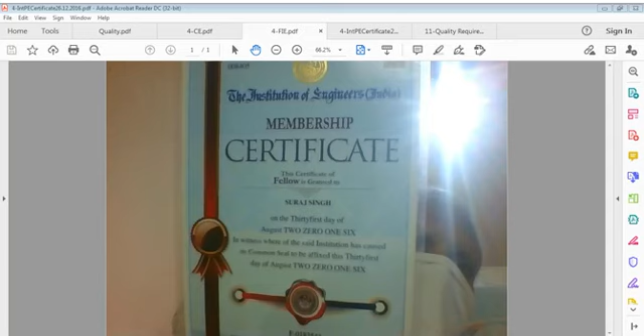Both of these classes I cannot call professionals because they are paraprofessionals. Meaning if somebody does it, they accept it, or say I have done it. If somebody does not, they ignore that. This point is not for criticism. This point is for the world, and in particular for our country, India, Bharat.

I'm interested in relating COVID-19 to quality and to the role of engineers, because the role of engineer applies everywhere in life. My purpose was to show you not to believe in certificates alone, because certificates tell something but people do not always do that. That point we must understand.

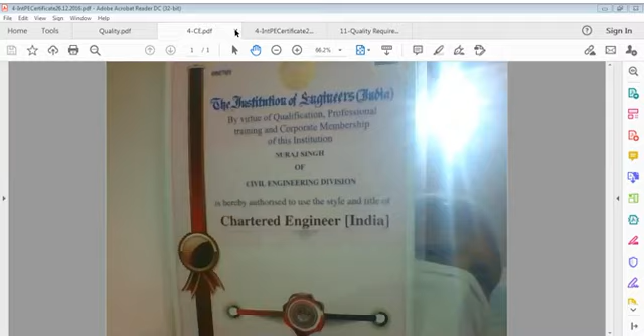It's not for everybody, but in general, people should believe in quality, not only believe it but work on it. My experience, whatever small or insignificant it may be, is a reality of the world.

If you work at many locations in the world - many thousands of you have worked at many locations in civil and construction engineering around the world, in the Middle East, in Gulf countries, in the West, or countries like Iraq, Iran, Libya - those who have worked in many countries, there will be many people like me. Just for your information, I have worked in Iraq, Libya, Qatar, Abu Dhabi or UAE, Saudi. These are certain countries I worked in.

What does it indicate? It indicates that you should have different, varying experience. I have been fortunate to work with more than 50 nationalities of all ranks and designations. This means one who is exposed to many nationalities is bound to have exposure to new types of work culture, new types of people's nature.

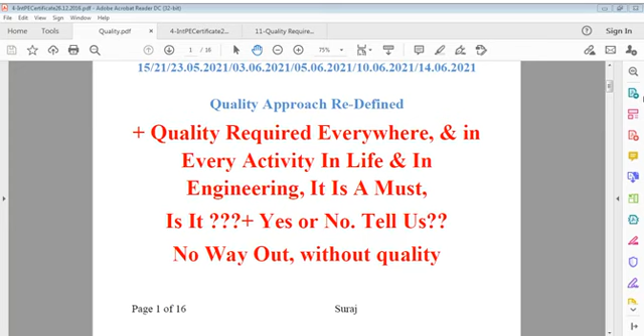Our project manager or director used to say, 'Oh, it's only a manhole, go and excavate, do it. It's nothing, it's not a project, it's not a building, it's only a manhole. You do not make concrete for 50 manholes per day, 20 manholes per day, like that.' He used to say it as if everything was so easy. They did not keep quality system in mind, because our project manager was from Bharat, India, of course South, and also the same, another person from Bharat, India on another project.

And I was on the Sharkat Grain Silos project, whose ancillary buildings I was taking care of. I still remember one resident engineer named Kifa. My colleague, who has left now, Mr. Chauhan, was taking care of the road project there, RCC paving. He told me this Kifa is very, very dangerous, everybody fears him. Though it was EPI company, the main contractor, nobody could face that resident engineer, and don't argue with him because he's very, very strict.

I said, what strict, let me see. I still remember 2 or 3 instances. He talked to me due to some activity I was doing on site. First I submitted my design of one slab. There was a slab left on one building, a workshop building, I still remember. Design of the roof, one slab was left, it was not done by PI for some reason. I did it myself, and though it was very small, I still designed it that time, manual design, everything, drawing, and we got approval.

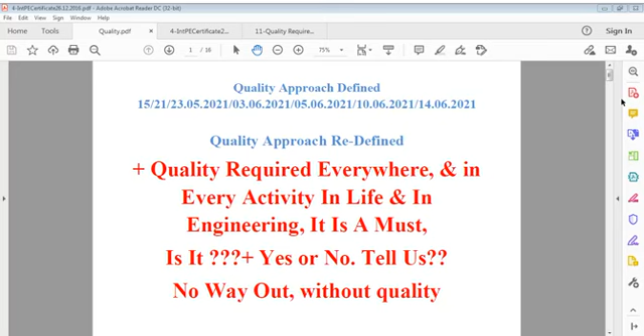So I am saying that quality is required everywhere, in every activity in life, and in engineering it is a must. Is it yes or no? You have to tell us. There's no way out without quality. Quality has to be complied with. Defined requirement, no future if no quality persists.

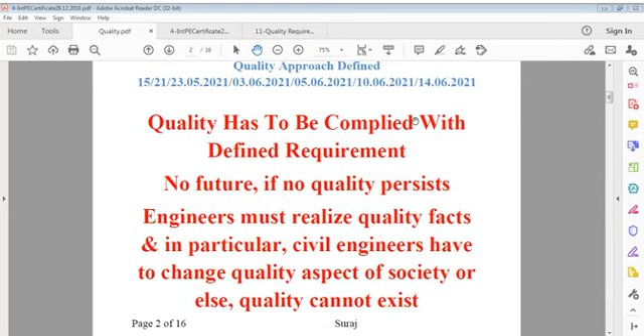Engineers must realize quality facts. And in particular, civil engineers have to change the quality aspect of society, or else quality cannot exist.

Systems quality to be devised. When I say devised, it means designed and achieved. Broken system means broken life linked to the system. Broken system means broken life that is linked to the system.

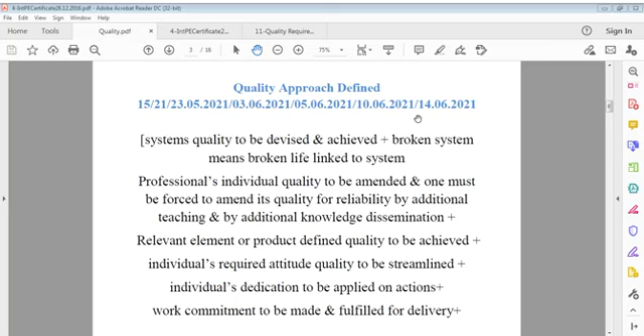Professionals' individual quality to be amended, and one must be forced to amend its quality for reliability by additional teaching and by additional knowledge dissemination. Relevant element or product defined quality to be achieved.

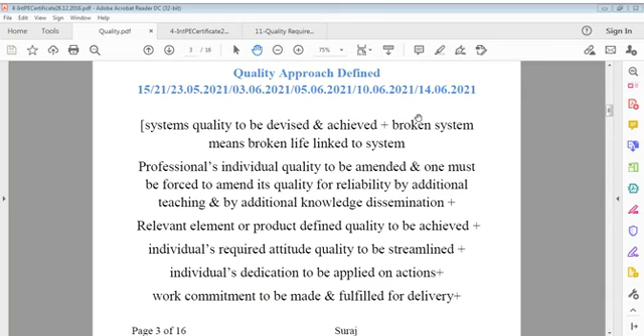Individuals' required attitude quality to be streamlined. Individuals' dedication to be applied on actions, work commitment to be made and fulfilled for delivery.

All other parameters to deal with pre-requirements and requirements, designs of structures and others must be decisive, qualitative and reliable for prosecution. All stages, designs being significant, but mere design does not suffice if construction and development are not affected to specified marks.

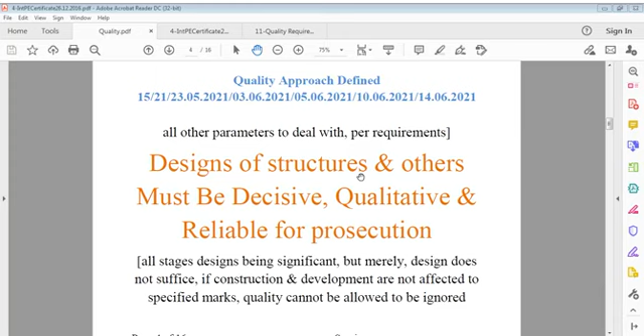Quality should not be allowed to be ignored. Design drawings must have quality input, and duly coordinated to produce working details, keeping abreast of site working conditions.

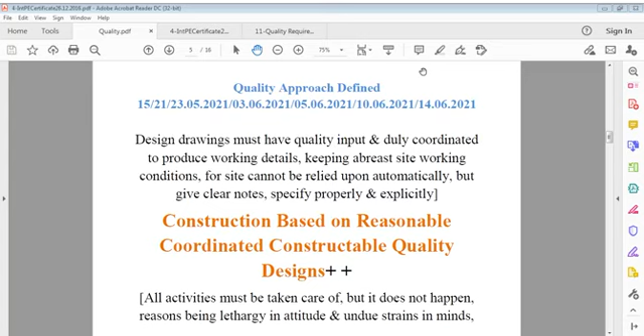Site cannot be relied upon automatically, but give clear notes, specify properly and explicitly. Construction based on reasonable, coordinated, constructible, quality designs. It's a very important point: construction based on reasonable, coordinated, constructible, quality designs.

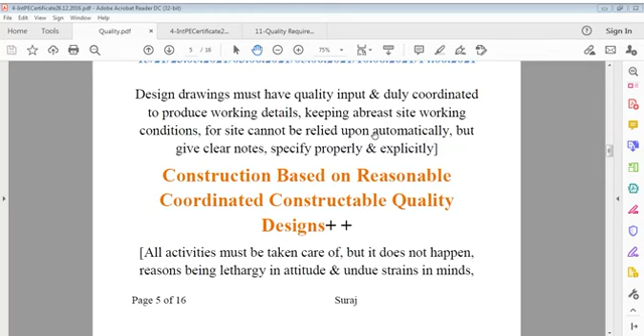All activities must be taken care of, but it doesn't happen. Reasons being lethargy in attitude and undue strains in minds. Why should site work suffer? Because of deficiencies in designs.

Design accountability must be fixed, it says, if accountability on the constructed product or element is required. Design and construction qualities are complementary to each other, and without integrated coordination, activities worked upon shall result in quality-less results.

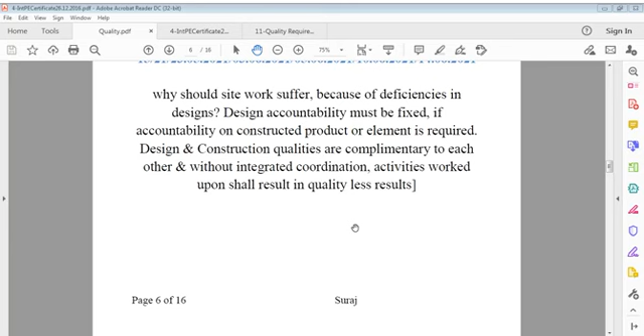These are just a few statements that I make in the interest of quality, and also construction method statement, a must for implementation. Because expression of specific details in convenient format, meaning usable format, readable format, not very complicated format, for work performance and defined elaborate performance, or else no work can be carried out in sequence and output suffers.

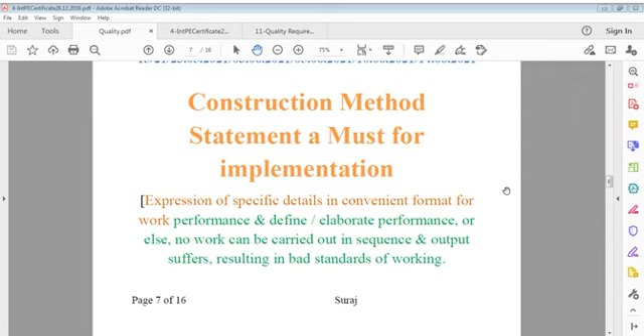Expression of specific details in convenient format for work performance and defined elaborate performance, or else no work can be carried out in sequence, whereby output suffers, resulting in bad standards of working.

Method statements must be made necessary for activities implementation, or else diverse ways can be used by site teams. Diverse ways, not one way, and diverse ways mean a problem, used by site teams without achieving any level of uniformity and consistency. Work harmony may not be found, work scaling cannot be found. One team does one way, another team does another way, so uniformity cannot be found.

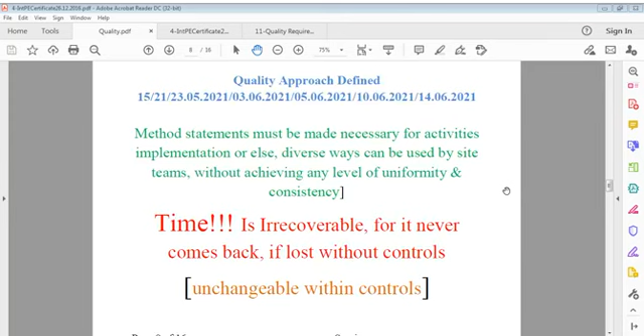Time is irrecoverable, for it never comes back if lost without controls, unchangeable within controls, and then we can say cost invariable escalation. Risks must be foreseen, for resolutions, for damages are not tenable.

Risks must be foreseen by a professional, an intelligent person, foreseen for resolution, not for enjoying. If you can foresee risks, it means you are an experienced person who keeps thinking in various aspects. Risks must be foreseen for resolutions, for damages are not tenable. Damages we cannot absorb every time, and these must be controlled in advance. Inexperienced engineers may prove inefficient in viewing such risk-based emergencies.

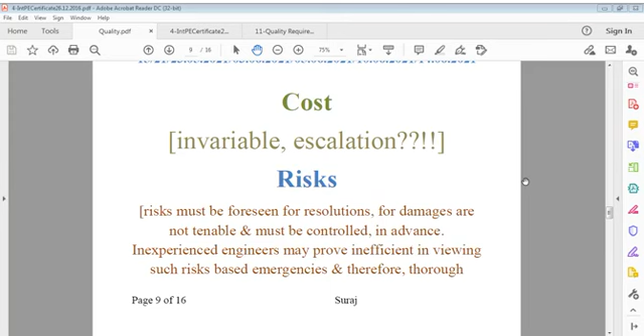Therefore thorough deliberation or brainstorming must be conducted based on available data input. Risks must be clearly defined to reach its resolution and to convert to work convenience, or else risk can be very expensive in terms of lives and cost.

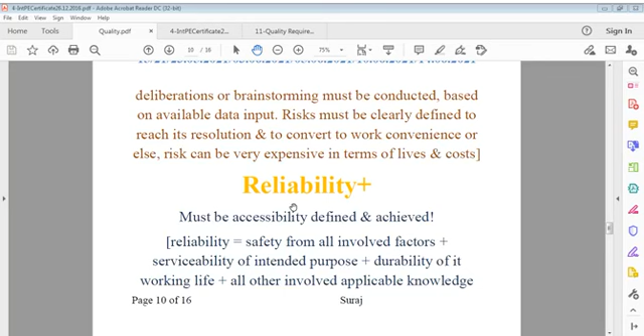Reliability must be accessibility defined and achieved. Reliability is equal to safety from all involved factors, plus serviceability of intended purpose, plus durability of its working life, plus all other involved applicable knowledge, areas, factors, resources must be understood and achieved in all procedures, or else one should learn before taking responsibility, and all foregoing issues must be considered along with all possible risks.

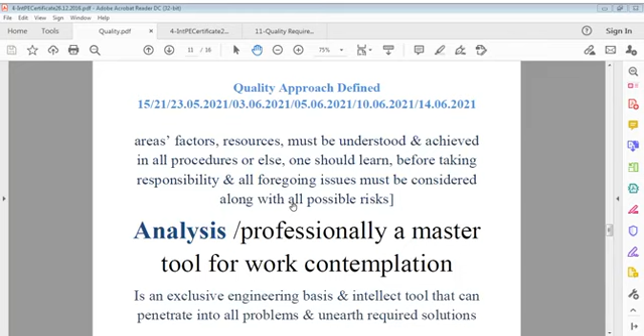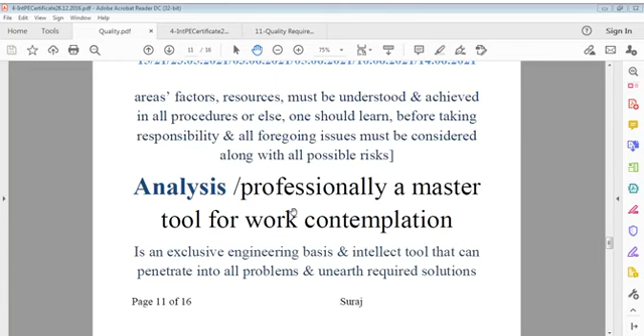Analysis, or professionally a master tool for work contemplation. It is a very important point to say it is an exclusive engineering basis and intellect tool that can penetrate into all problems.

And there exists no way from where or through which analysis approaches could be avoided. All problems must be understood by this approach.

This is very much, you can say, the concept of quality which we have to take care of. We cannot take quality for granted. Quality approach is variously immense, it's varied. Quality at different levels is defined depending on funding and depending on goal in life.

When you pay for something, what do you think? You should get that, right? That's what everybody thinks. When I pay for this, I must get that. That is the simplest form to understand quality. You pay me back what I pay for. If you don't pay me back what I pay to you, then this is an incomplete transaction. You charge me, but you are not giving the service.

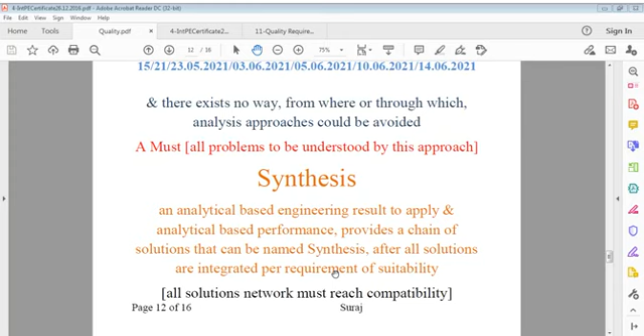In that case, we have to be very careful about that point. Synthesis is an analytical based engineering result. To apply an analytical based performance provides a chain of solutions that can be named synthesis. After all, solutions are integrated per requirement of suitability.

We have to understand these basic points before jumping onto what we say. If we can handle this well, I think it will be better. We can handle, we can understand. It shall be much better than something else. So that's what I say is important.

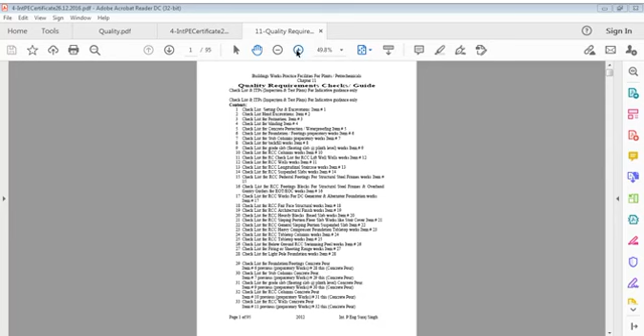Here's a list of titles of quality requirement that we are going through so far. These titles are very important for day-to-day engineering of everyone, whether you supervise or you construct, it doesn't make a difference. These are important. If responsibility of contractors to supply something for quality requirement, there is a responsibility for contracting people for whom construction goes on. They are supposed to.

So we have to be very careful in this approach. We cannot take it for granted. Quality is a very important matter. Quality loss means product loss. Quality loss means reputation loss. Quality loss means future loss.

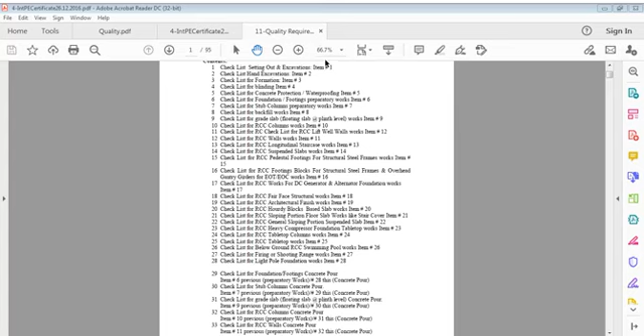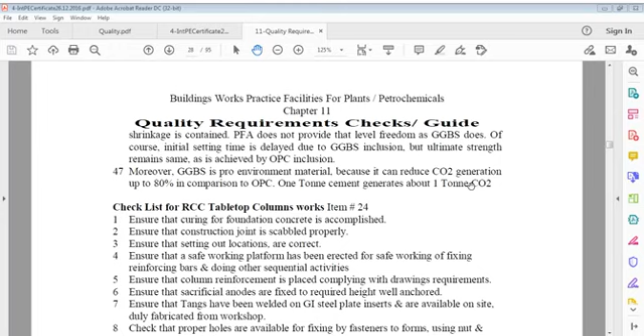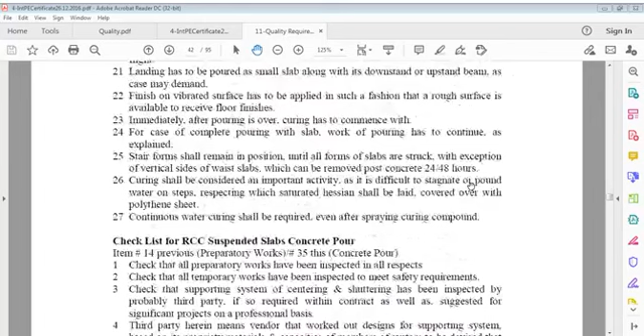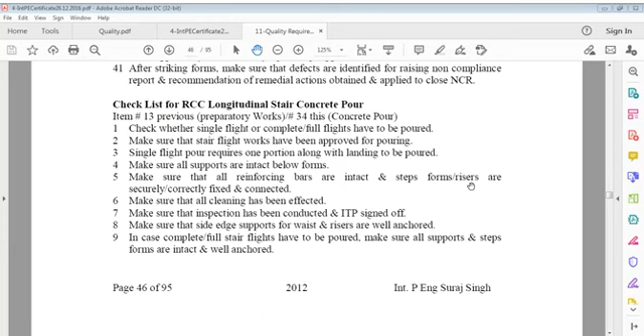I was talking of concrete pours actually. Concrete pours of various items, just talking about it. We can't take for granted concrete pours. We also have suspended slabs, then we talk of many pours. Yesterday I did not talk of this. Let's take this way, lift well. I repeat from here because this is a very important item.

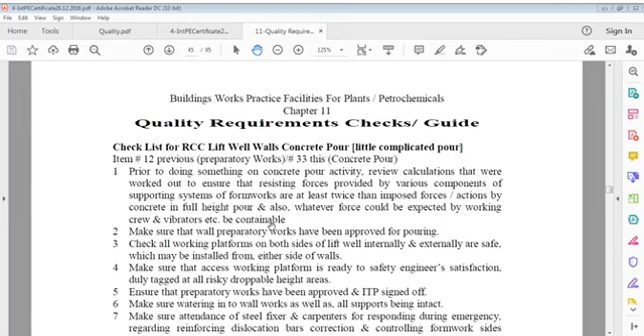Lift well, maybe some people don't have a clear idea about this. As I said, this is a very important item. You have lift, it has a wall. You can see this now. I'll show you this sketch again because the sketch tells so much in that.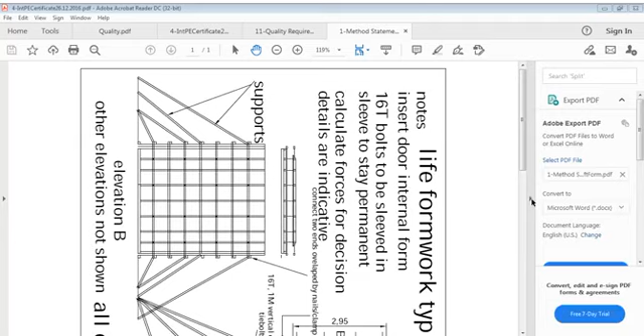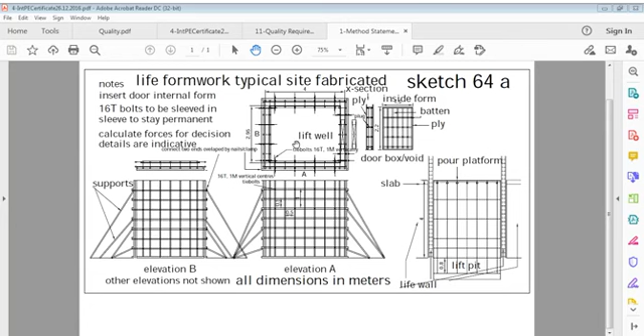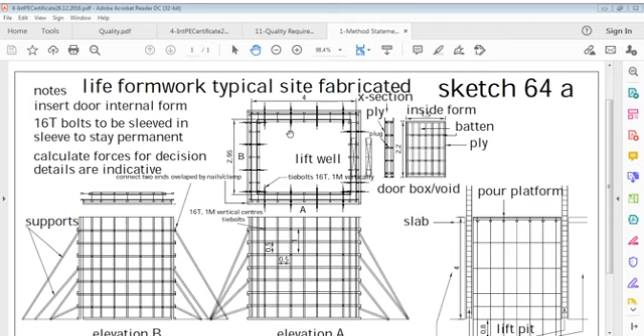Now this is just a formwork diagram of lift. Diagram, you cannot say is detail actually. This lift, what I have to say is that you can know this is shutter, internal and external both shutters of lift. I talked about this in explanatory notes, explanatory discussion on how this formwork is erected or installed temporarily as preparatory work to receive concrete pour.

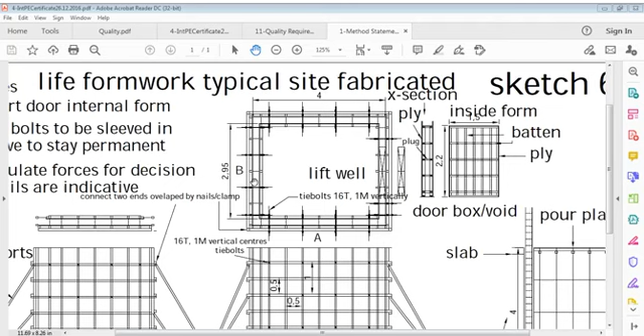I'm not going to explain again what is this, but I'm just trying to explain something in this, that you have to make sure before pouring all these details are done. It's not one day job. Depending on area available, you can see just 4 meters by something, 3 meters approximately. So you cannot keep undue resources on this to finish this job in one day, half a day, or 4 hours. No, that's not possible, it takes time.

You may not keep more than 2 or 4 carpenters inside and 2 or 4 carpenters outside, it's not going to work. You cannot engage 20 carpenters on this and work, no, that's not it. If it's a big area, it's okay, but it's not big area. Or it may be a lift bank, which I have not discussed yet.

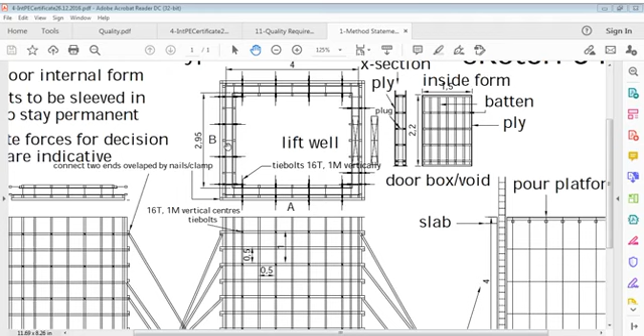Lift bank means, for example, a lift orientation like this. There's another lift here, same. Then there's another lift here, you can say 2, 3, 4, whatever number of lifts there, you can call them lift bank, with similar details. Only difference is that if I say keep this one lift here, it becomes a bank, of course, with two lifts, but then this wall becomes common to both.

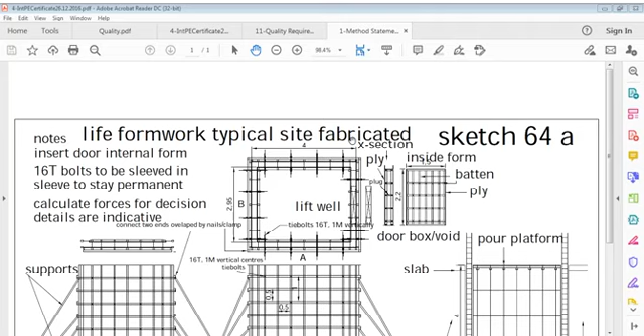If I keep one here, one down, these two walls of this lift become common to other two lifts. You will say scenario changes - we'll discuss that later. This drawing is not ready, but if I find this drawing, I can change that. That's not a big deal.

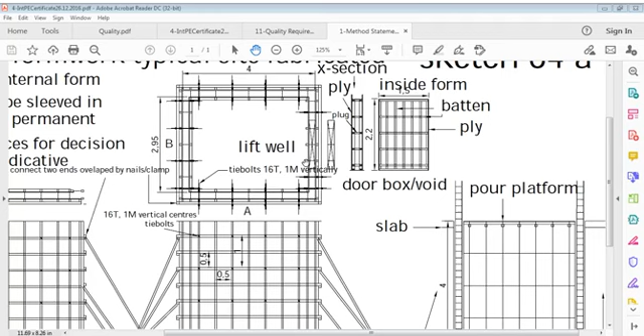But here now, what I'm saying, how to pour it, that's the point. This is ready as it is. This is platform inside in lift well area where lift pit is shown, and this platform is for workers to stand on, keep vibrator on, and have access to this portion.

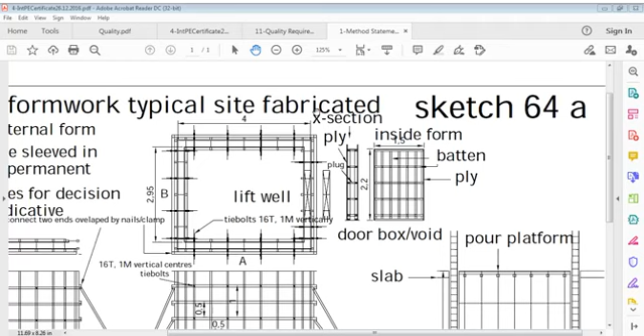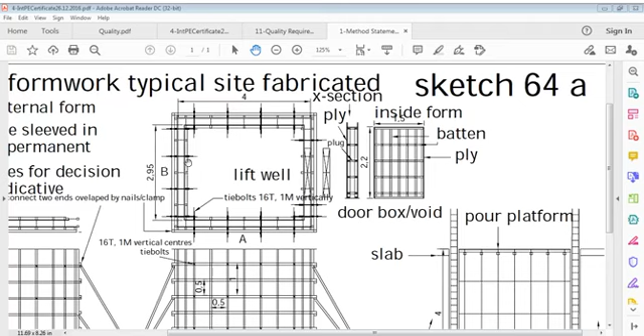So that's only difference, but how to pour it is the point. First you make sure everything is inspected, checked, reliable, and your calculations were right - these won't fail calculations about forces coming on this. Forces from concrete, forces from people, workers, forces from somewhere else. Whatever is coming on this preparatory work should be digested, registered by these bolts provided, registered by the supporting system on all sides.

This by these scantlings or timber battens and ply, all that. These three items, systems of plyboard and your scantlings or timber pieces, wooden pieces - these supports inside as well as outside, these bolts per meter, you have to calculate that.

You must have calculated before doing all this system, otherwise you would not have done it. Then you have to see that calculation was right. In case by chance you made an error, you can close these supports and add more supports to compensate for that. That can be done. And you have to make sure whatever was done, because it's not one day job - it might have taken a week, so in a week there could be any imbalance.

So we have to make sure whatever was done is still intact. This is not slab that will come down, it's only walls, but quality of work must be important because verticality is more important in this case. Shape of lift well in plan is more important - all these corners must be in design coordinates. You have to make sure before pouring.

I will check again, double check, because during preparatory works, installation or erection, there could be some moment, something which every day we noted. Otherwise I don't want to see - you don't want to see twisted concrete, nobody will like to see it. When you see from top into lift well, you'll say oh what a well it is. Same from bottom, see what a shaft it is - and that's the mind everybody wants to use here.

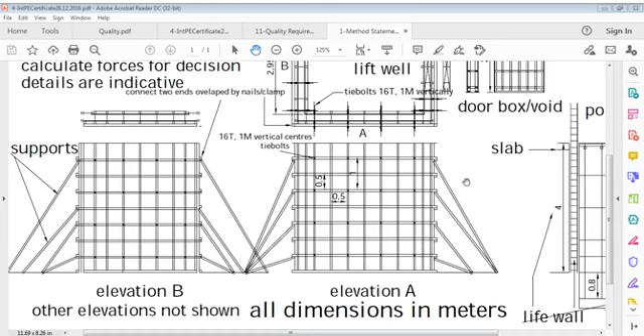That's the purpose here. So we can say it will not take much time to make sure everything is intact, the support is intact. It can be seen by random check, or by sending some reliable carpenter to make sure everything is fine, or some foreman to show - actually make check, don't leave it.

It's okay, you don't assume anything. Because this question of bulging out of concrete, this question of failure of platform which can result in accident - generally it doesn't happen, but sometimes bad time can bring everything. So your job is to check, don't feel bored in that. Examine, check, examine, investigate before danger comes, before risk comes.

That's what risk control is, and this is also a part of risk control. You can say we can control risk like that. If you can control risk like that, you are a good organizer, you are a good contractor. I can say you are a contractor because you are working for a contractor.

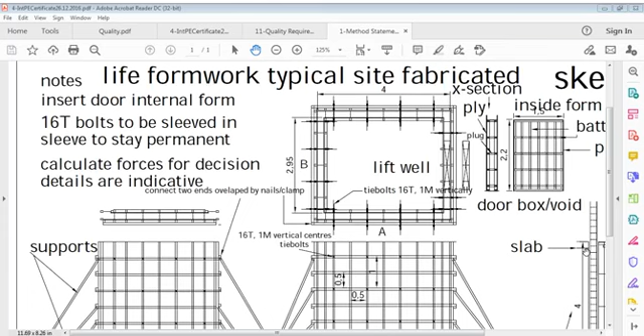It doesn't mean you should be a contractor, but as an engineer you are more responsible because you are doing work for that contractor, so you know all technical details. Maybe you are not aware of commercial nature, but if you are a manager, you organize, you are also knowledgeable about commerce. Here you are not concerned with commerce, you are concerned with technical. But technical is important - that's why commercial is important. If technical is not important, you can't say commercial is important. Technical work leads to commercial gains. That's the principle of construction. If you construct it technically suitable, approvable, commercially it automatically becomes approvable.

It depends on your way of using your resources for best, or optimum, gains. Your resources like human resources, equipment - every minute, every hour counts, don't forget. So we have to be smart enough ourselves. The engineer has to be smart enough for the purpose of doing the job and getting the job done.

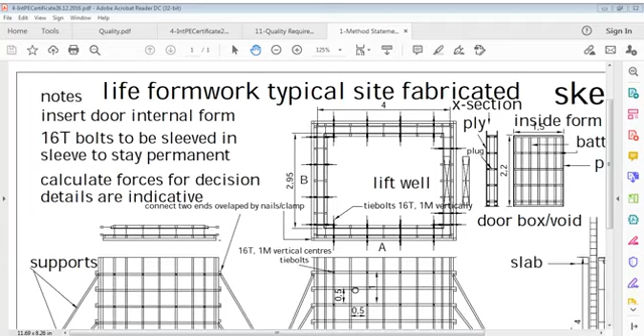So what I say now, this 4-meter height, how shall we cast? That's another important point to discuss. I'm not going to touch this now, but I'll explain how to do it.

But the important point here is at 2.2 meter height we have a restriction, and that obstruction is the door. It's not free - meaning if I want to pour this portion up to 2.2 meters, I can't freely pour. I have two restrictions here: one jam on this side, this end, and another jam this end. These are two major obstructions up to a height of 2.2 meters, or 5 or 6 layers, or 5.5 layers. These cannot allow me circulation to my will.

So what should be done? This is not such a place that 2 pumps can be installed in this location - already it is 4 meters by something, 3 meters. So there is no question of 2 pump installation. Only one pump can be useful, and if others are there, you can't take immediate action on them.

So what I said, we have to pour these 2.2 meters, or 5 or 6 layers of concrete, 400 mm each, in a little tricky style. Tricky because pressure is involved - concrete horizontal pressure, concrete vertical pressure, or concrete resultant pressure is involved. Concrete forces are involved, bending moment is involved, and because bending moment is involved, automatically the ring.

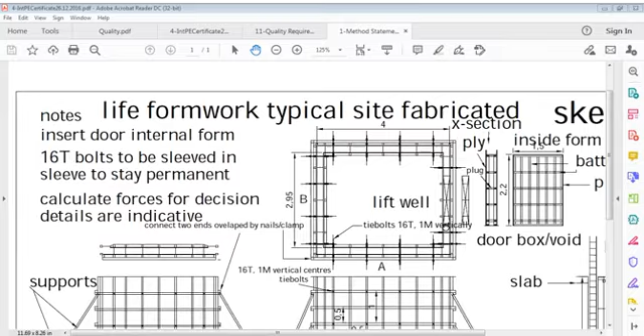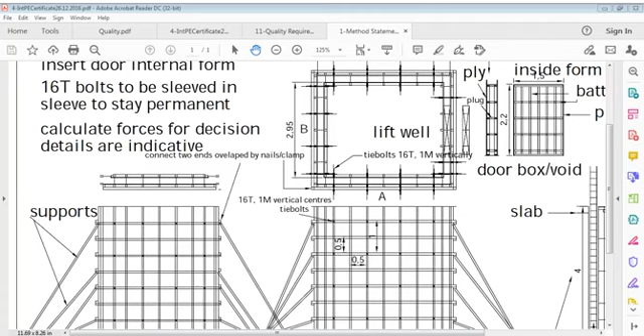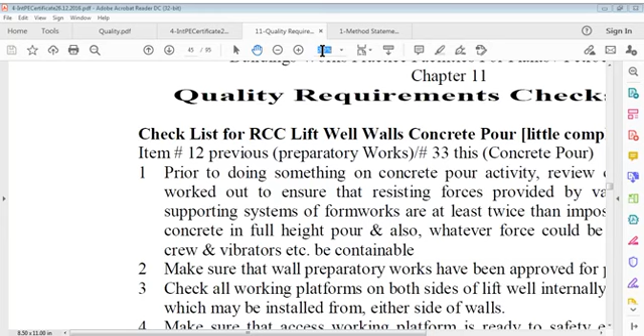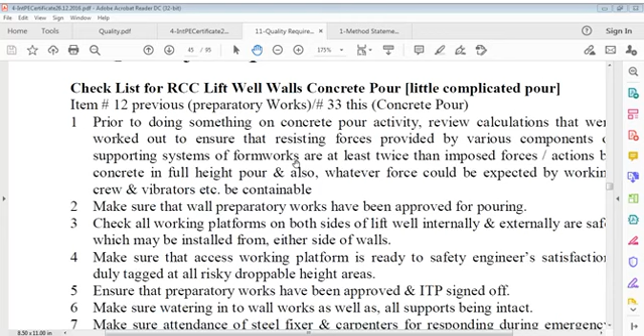Now I can say if you read this statement, it will be very clear what it says. It says, just for your refreshing I'm reading, checklist for... here it is 175, I put 175 and let's see. Checklist for RCC lift well walls concrete pour, a little complicated pour it is, prior to doing something on concrete pour activity: review calculations that were worked out to ensure that resisting forces provided by various components of the supporting system of formworks are at least twice the imposed forces and actions by concrete in full height pour.

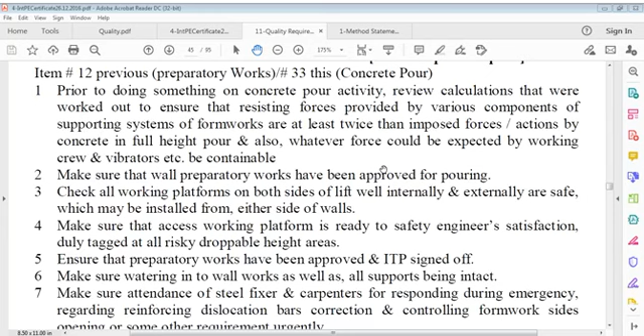Also whatever force could be expected by the working crew and vibrators etc. must be containable. Make sure that wall preparatory works have been approved for pouring. Check all working platforms on both sides of the lift well, internally and externally, are safe. I mean safety from every aspect, from forces aspect, from working forces aspect. All safety must be taken care of. Check all working platforms on both sides of the lift well internally and externally are safe, which may be installed from either side of the walls.

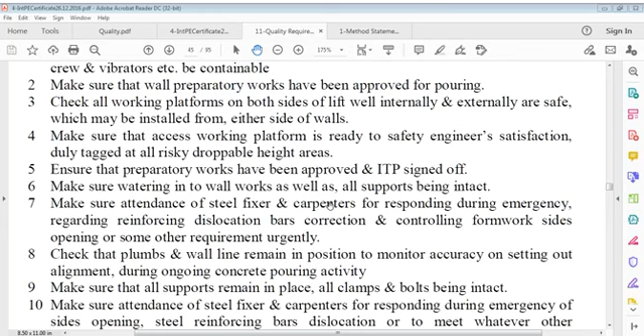Make sure that access working platform is ready to safety engineer satisfaction, duly tagged at all risky drop-able height areas. Ensure that preparatory works have been approved and ITP signed off. Make sure watering into wall works as well as all supports being intact. Make sure attendance of steel fixers and carpenters for responding during emergency regarding reinforcing dislocation, bars, correction and controlling formwork.

Check the plumb wall lines remain in position. Plumb and wall lines, I mean to say wall locations, remain in position to monitor accuracy on setting out alignment during ongoing concrete pouring activity.

I just put that so that I won't lose this.

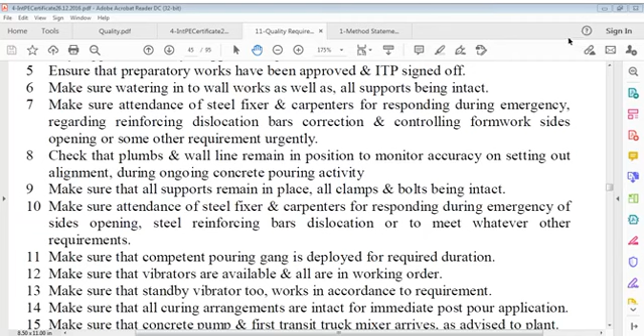Make sure attendance of steel fixer, ensure that preparatory works have been approved and ITP signed off. Make sure watering into wall works as well as all supports being intact. Make sure attendance of steel fixers and carpenters is a very important point for responding during emergency regarding reinforcing dislocation bars, correction and controlling formwork sides, opening or some other requirements urgently. Check that plumb and wall line remain in position to monitor accuracy on setting out alignment during ongoing concrete pouring activity.

Make sure that all supports remain in place, all clamps and bolts being intact. Make sure attendance of steel fixers and carpenters for responding during emergency of sides opening, steel reinforcing bars, dislocation, or to meet whatever other requirements.

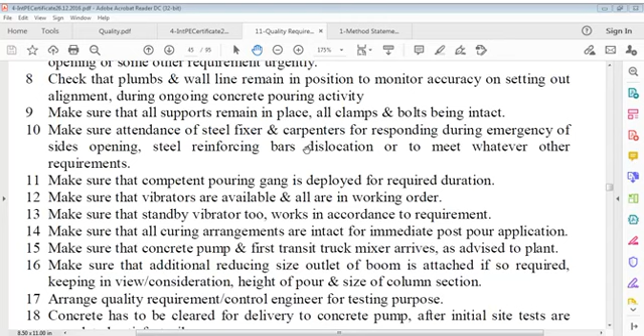Make sure that competent pouring gang is deployed for required duration. Make sure that vibrators are available and are in working order. Make sure that standby vibrator works in accordance to requirements. Make sure that all curing arrangements are intact for immediate post-pour application.

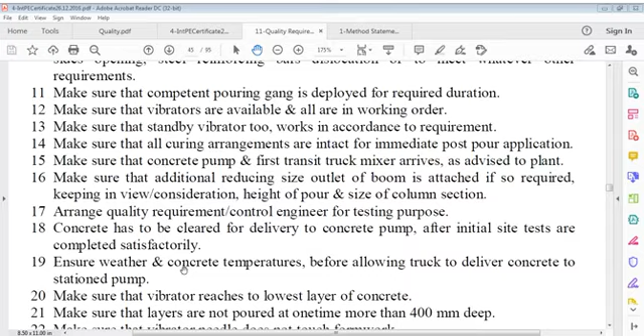Make sure the concrete pump and first in transit truck mixer arrives as advised to plant. Make sure the additional reducing size outlet of boom pipe is attached if so required, keeping in view consideration height of pour and size of column section. Arrange quality requirement control engineer for testing purpose. Concrete has to be cleared for delivery to concrete pump after initial site tests are completed satisfactorily.

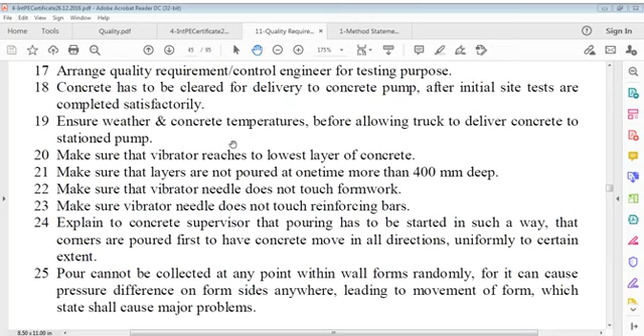Ensure weather and concrete temperatures before allowing truck to deliver concrete to stationed pump.

Make sure the vibrator reaches to lowest layer of concrete. Make sure that layers are not poured at one time more than 400 mm deep. Make sure that vibrator needle does not touch formwork. Make sure vibrator needle does not touch reinforcing bars.

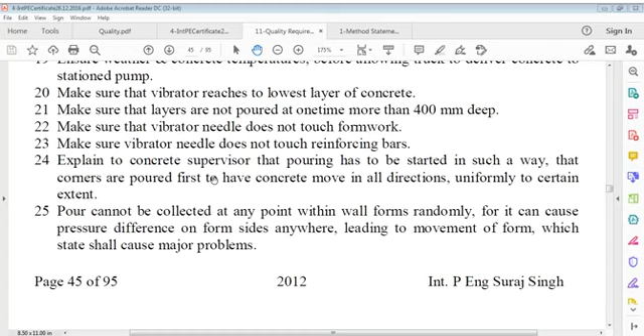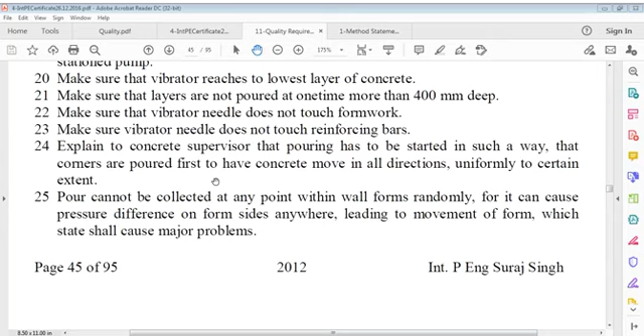Make sure that everything is okay. Explain to concrete supervisor that pouring has to be started in such a way that corners are poured first to have concrete move in all directions uniformly to certain extent. Pour cannot be collected at any point within wall forms randomly, for it can cause pressure difference on form sides anywhere, leading to movement of form which shall cause major problems.

Lift well is a complicated pour which requires uniformity on concrete pour to maintain concrete fluid pressure at constant level all around pour periphery. Suggested that site engineer must take direct responsibility of such complicated pours, whether it is single lift well or lift banks wells.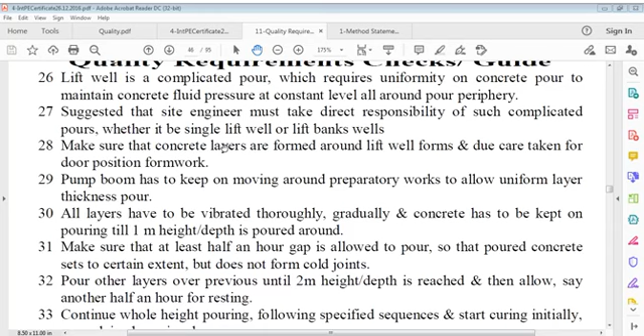Make sure that concrete layers are formed around lift well forms and due care taken for door position formwork. Pump boom has to keep on moving around preparatory works to allow uniform layer thickness pour. All layers have to be vibrated thoroughly, gradually, and concrete has to be kept on pouring till 1 meter height depth is poured around. Make sure that at least half an hour a gap is allowed to pour so that

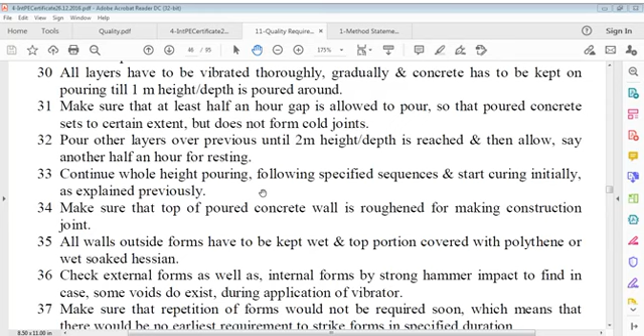poured concrete sets to certain extent but does not form cold joints. Pour other layers over previous until 2 meter height depth is reached and then allow say another half an hour for resting. Continue whole height pouring following specified sequences and start curing initially, as explained previously.

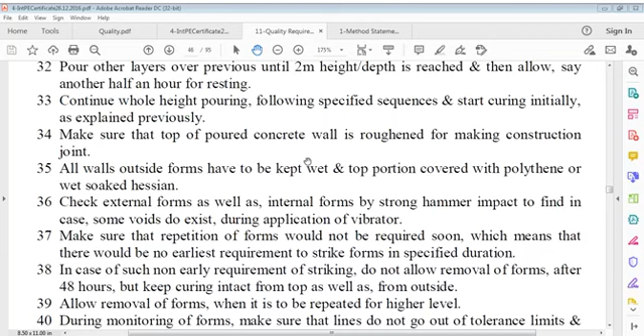Make sure that top of poured concrete wall is roughened for making construction joint. All walls outside forms have to be kept wet and top portion covered with polythene or wet soaked Hessian. Check external forms

as well as internal forms by strong hammer impact to find in case some voids do exist. During application of vibrator, make sure that repetition of forms would not be required soon, which means that there would be no earliest requirement to strike. Do not allow removal of forms.

In case of such, make sure that repetition of forms would not be required soon, meaning there would be no early requirement to strike forms within a specified duration. In case of non-early requirement of striking, do not remove forms after 48 hours, but keep curing intact from top as well as outside. Allow removal of forms when it is to be repeated for a higher level.

During monitoring of forms, make sure that lines do not go out of tolerance limits, and if that happens, try to reinstate by tightening supports.

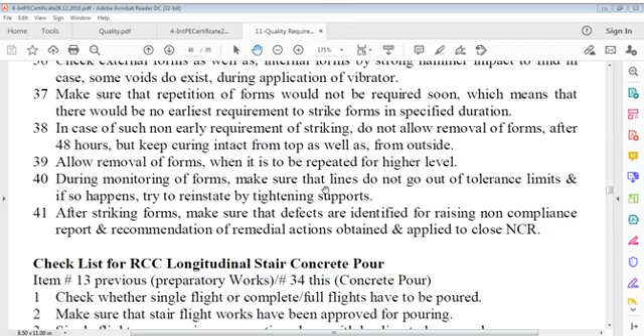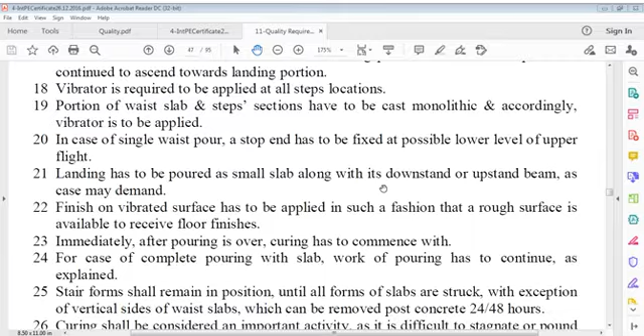Checklist for RCC longitudinal staircase. For longitudinal stair I have shown many times. There are so many points in that, but let us see what they are. How many points are there? I can say there are 27 points. So let me finish that. I'll close this talk later on.

It says check whether a single flight or complete full flight has to be poured. That's the point here. But generally, practically, what happens? We pour only one flight. First flight we pour with bottom slab and top. Second flight we pour with top slab. This is usually done, but there is no hard and fast rule. Let us assume this way, and we can say okay, check whether single flight or complete full flights have to be poured.

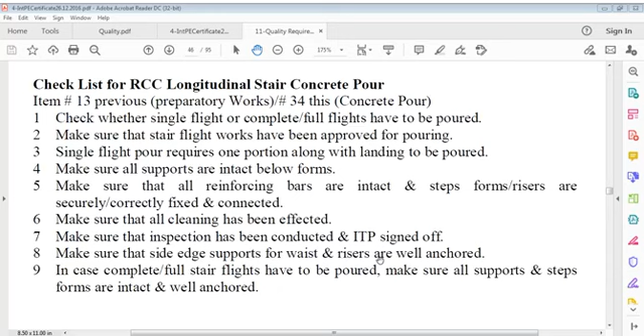In case complete full stair flights have to be poured, make sure all supports and steps forms are intact and well anchored. Make sure that all reinforcement bars remain in correct positions while walking on steps, and that riser forms do not twist in either direction. Make sure that cleaning has been completed.

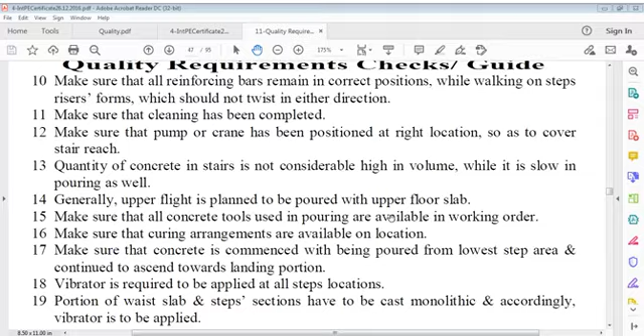Make sure that pumps or crane have been positioned at the right location so as to cover the stair reach. Quantity of concrete in stairs is not considerably high in volume, while pouring is slow as well. Generally, the upper flight is planned to be poured with the upper floor slab. Make sure that all concrete tools used in pouring are available in working order. Make sure that curing arrangements are available on location.

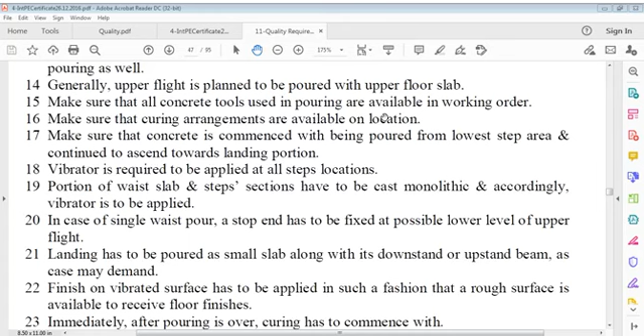Make sure that concrete pouring commences from the lowest step area and continues to ascend towards the landing portion. Vibrator is required to be applied at all step locations. Portions of the waist slab and step sections have to be cast monolithic, and vibrators applied accordingly.

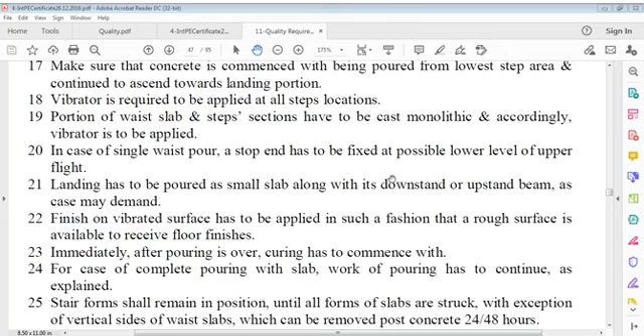In case of a single waist pour, a stop end has to be fixed at the possible lower level of the upper flight. Landing has to be poured as a small slab along with its downstand or upstand beam, as the case may demand. Finish on the vibrated surface has to be applied in such a fashion that a rough surface is available to receive floor finishes.

Immediately after pouring is over, curing has to commence. For the case of complete pouring with slab, work of pouring has to continue as explained. Stair forms shall remain in position until all forms of slabs are struck, with the exception of vertical sides of the waist slab, which can be removed 24 to 48 hours post-concrete.

Curing shall be considered an important activity, as it is difficult to stagnate or pond water on steps. Respecting which, saturated hessian shall be laid and covered over with a polythene sheet. Continuous water curing shall be required even after spraying curing compound. This is a very important pour, and we have to consider it carefully.